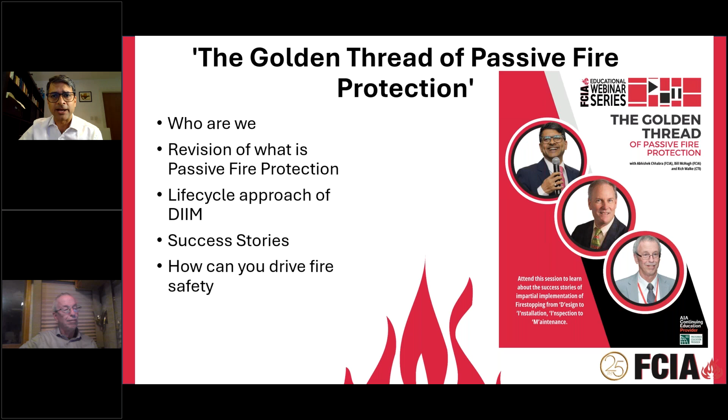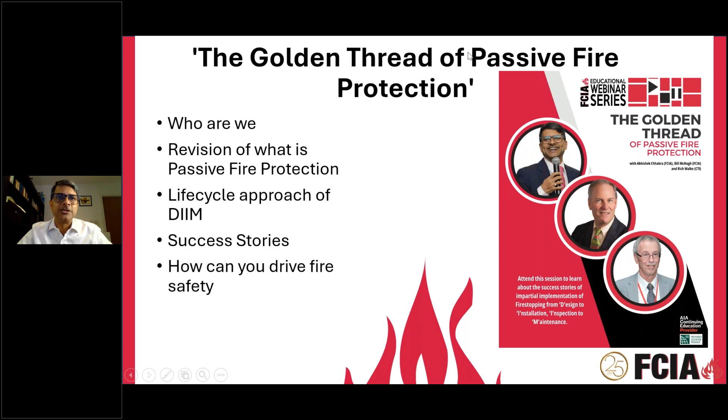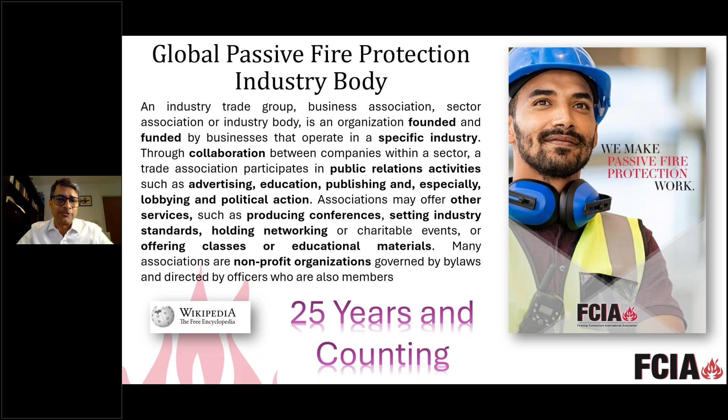We are a very typical industry association, probably very global, within the passive fire protection space. Here is a quick definition from Wikipedia, and I realized that we fit into almost everything that an association would typically stand for. We tick all the boxes of what associations are supposed to do, and we've been around for 25 years, a quarter of a century.

Very quickly, who we are: an international association of specialty firestop and passive fire protection contractors, special inspection agencies, manufacturers, distributors, and more, dedicated to the consistent design, installation, inspection, and maintenance of firestop systems and effective compartmentation barriers, all essential components of passive fire protection.

I'm deliberately taking time to read all of this just to make sure that I emphasize that it is one good big family where people from all over the world are aligned with the goal of driving fire safety across their jurisdictions, countries, and wherever they operate.

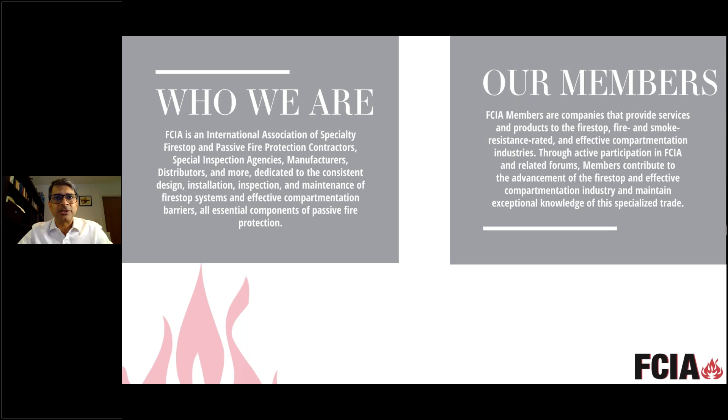Our members are companies that provide services and products to firestop, fire and smoke resistance rated, and effective compartmentation industries. Through active participation and activations like this session, and a whole raft of other forums and platforms where we engage, our members are able to contribute to the advancement of firestop and effective compartmentation, and maintain exceptional knowledge of this very specialized trade that has been enhancing fire safety all over the world.

Our members are global experts and providers of life safety, passive fire, and smoke protection. I'm very excited to share that since 1995, our goals have been and continue to be focused on building the reliability of installed firestop systems through the DIIM, which we will talk about today - what is DIIM - as well as focusing on building the firestop and effective compartmentation industry through advocacy, education, and membership.

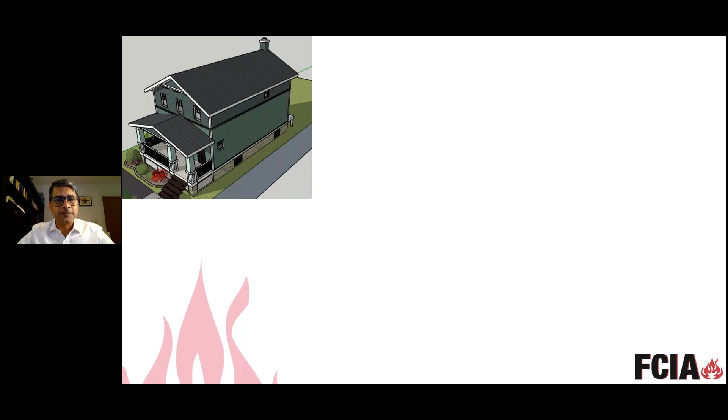At the end of that, I have a small poll again. So please bear with me in imagining what I'm going to ask all of you to imagine. I want you to think along with me and look around and see where you are, just so that we can start imagining and understanding what is passive fire protection. What constitutes passive fire protection? Maybe you are sitting in your home, an office, or a commercial building - look around you, look at how the compartment around you has been created.

Can you imagine or see the walls around you? What are the openings? Some pictures are on your screen to help you understand and imagine this. But for the purpose of imagination, just think: if a fire breaks out in any of these areas, how will that fire get compartmentalized, suffocated, enclosed, and where can that happen?

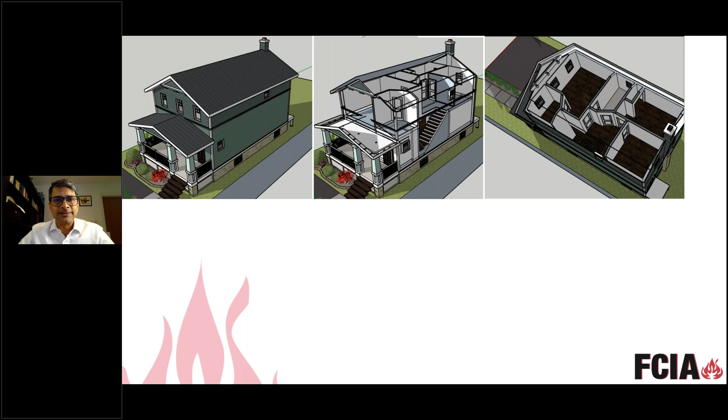This is the primary genesis of containment, or passive fire protection. There are numerous materials, products, and systems that create, build, and maintain this containment. Some of these are here on your screen, and while this is not an exhaustive list, these are primarily the systems that bring about containment, the motive of passive fire protection.

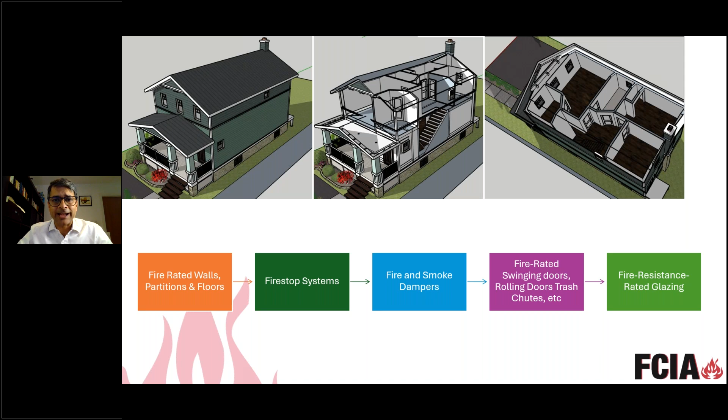This means it is the first line of defense. It can contain the fire even before the sprinklers and smoke detectors function in other parts of the zone or containment area where the fire could have initiated. If passive fire protection has been correctly designed, installed, inspected, and maintained, then if there is a fire incident, it can be contained as an incident and will not become an accident. You will not have all the sprinklers and smoke detectors kicking in. No, it will be contained within the room or floor where the fire initiated.

Very similar to this is structural fire protection. Here, we make sure the structure is able to maintain its structural integrity despite having to face a fire. Probably this is well known: structural steel typically maintains its structural integrity up to maybe 500 to 700 degrees Celsius. But with structural fire protection, or intumescent fire protection, we are able to enhance this structural integrity for a fairly long time.

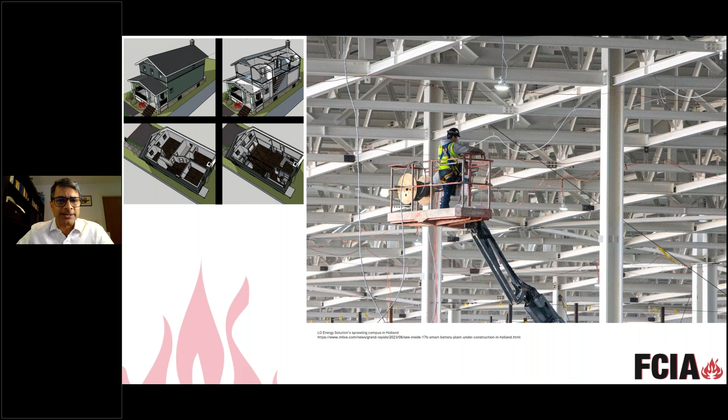Before I delve a little more into the complexity and look through some of the questions that have been coming in, may I just ask the audience to give a quick click of the button and say: where is everyone? How often do people really face or use passive fire protection?

It's good to see I am already getting some questions, and that's very nice. I'd love to hear other questions which we could answer towards the end of this session. It's good to see there are people who use or understand passive fire protection less than 25% of the time, because these are the people we'd love to talk about and share more about passive fire protection with.

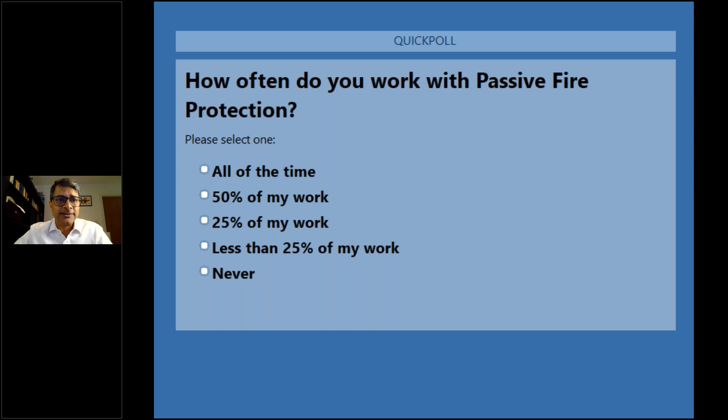I'll give it a few more seconds before moving to the next slide, to touch upon how passive fire protection typically gets implemented in buildings. There is a long list of stakeholders when any infrastructure or occupancy type is conceptualized, designed, delivered, and maintained. The starting point, typically, is what we call the fire and life safety plan.

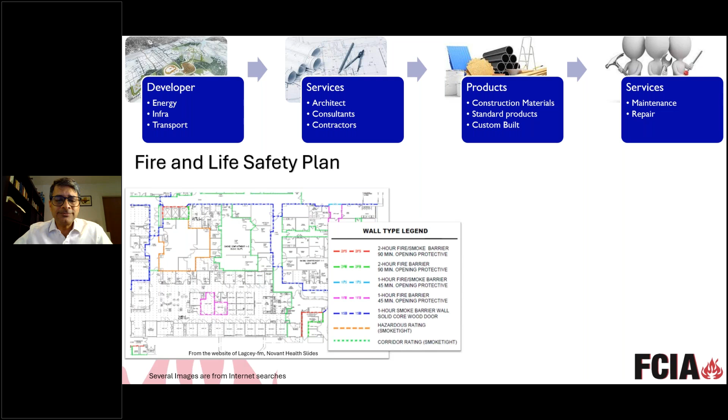You have probably seen a fire and life safety plan, but typically this is one of its outcomes. It will define where all containment is required and how much containment has been designed. That's a great starting point for a lot of types of businesses to come into action.

There are people producing materials, products, and systems, spending considerable time, effort, and energy to prove that all of these can fulfill the requirements of the fire and life safety plan. These products and materials can be correctly designed so that what was originally thought of in the plan, to ensure fire and life safety is maintained, can actually be maintained. So there is a lot happening in this space.

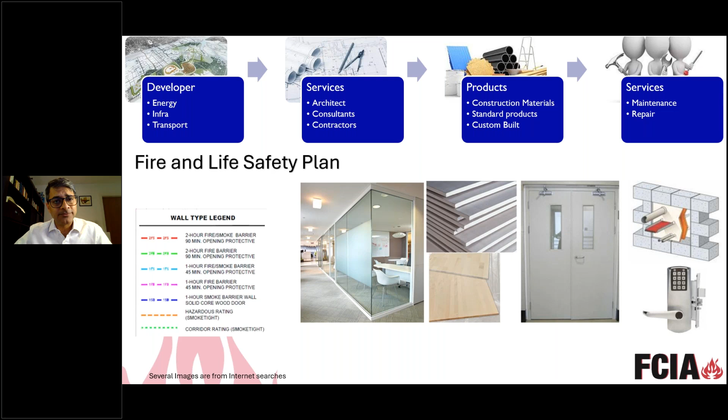Once all of this is correctly done and the building changes hands from contractors to occupiers, that's when maintenance comes in. Here is a quick snapshot from the Joint Commission, a global accreditation body within the healthcare industry, which talks about the requirements of maintenance and inspection. The JCI requires an annual inspection report of all passive fire protection installations, meaning what was designed in the fire and life safety plan, and what was built, now has to function and show that it continues to work to maintain fire and life safety all across.

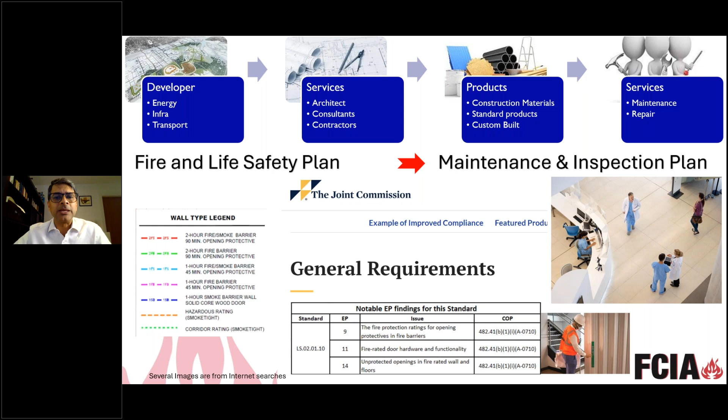Sometimes all of this can be very, very complex. In order to bring sanity to this complexity, FCIA as an association has been spending a lot of time and effort solving these issues and challenges by bringing about various standards. I'm going to move on and hand over the mic to Bill after this slide, and allow him to introduce some of the key tools and the DIIM model of FCIA, which has been providing the basis to the industry and users everywhere to make sure passive fire protection is designed and delivered correctly. Over to you.

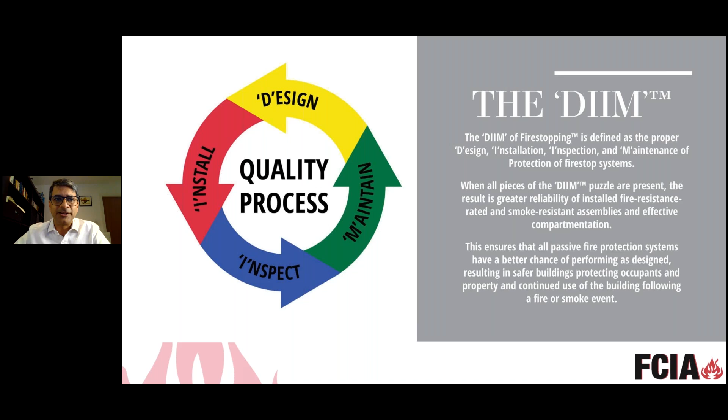Thank you, Abhi. Are you around? Yes, I'm here. Really appreciate it. Had an echo just for a second.

Hopefully it's gone. Good. So let's talk a bit about the DIIM. This is really an industry story, if you think about it. This discussion actually started long before the FCIA was formed in 1998 and 99.

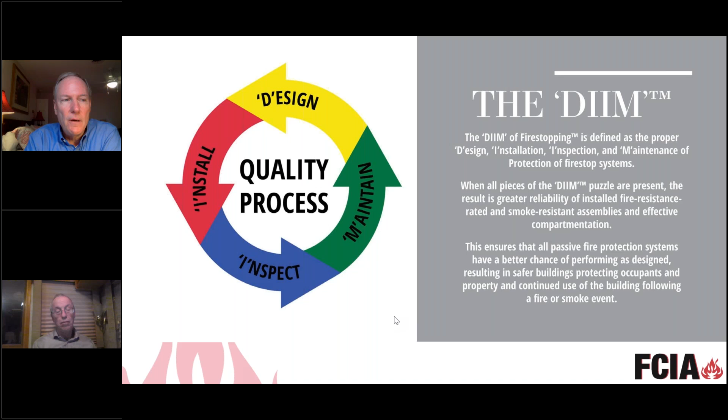Rich Walke and I attended and spoke at a Construction Specifications Institute conference. It was a chapter meeting, downtown Chicago, and we brought together the whole passive fire protection industry, as much of it as we could gather in a short time for an evening presentation about fire resistance in buildings and passive fire protection. We actually talked about this, but we didn't name it, the DIIM.

We did not name the proper design, installation, inspection, and maintaining protection at the time. We just asked the questions. How come there isn't something that separates the contractors that really get what fire stopping is from those that don't? Why don't we have inspection like there is in fireproofing, for instance? Why don't we maintain protection of existing buildings? This is an industry story. It started in 1994. And then when the association formed in 1998...

At that time, I was actually a contractor trying to buy a good-sized contracting company. And I was a founding member along with 7 or 8 others, and we sat around a table and asked these same questions. Why isn't there good, strong specifications, code requirements, standards?

Why isn't there an installation program that separates the contractors that get it from those that don't? Why isn't there inspection? How come we don't have a book or a knowledge base to teach from? What about getting involved in codes and working with specifiers to really make this industry such that the products made by the manufacturers actually get installed the way they were supposed to be? How do we complete that circle? And that's where this proper design, installation, inspection, and maintaining protection philosophy, the trademarked DIIM, came from.

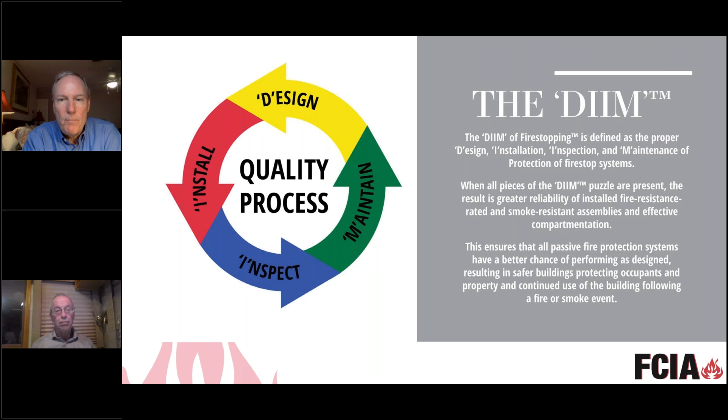And we'll talk about how that came together in probably the next slide. So let's hop on to the next thing there, Abhi. The next slide, and off we'll go. So let's talk about the D, design, first.

Once we have these programs, I'll talk about the IIM, all three of those. We should actually be talking about IIM first, then D. So we call it IIM instead of DIIM, at least this morning. But the D is a whole bunch of things.

Certainly it's about construction documents, and that's what the specifier does. That's their job. The architect's job is to take what is written in the building codes, regardless of where they are in the world, and communicate it through the construction documents to the contractors, the general contractor and the Firestop specialist contractor. How are they going to do that? They have to understand what's going on in the industry and communicate what they think is the right thing to do. That's where we work with specifiers to make sure they have the proper 078400 specification.

We also work with the code officials. Rich and I, in a couple of weeks, will be in Long Beach, California for about almost two weeks to present about passive fire protection just as we are today. After that we have an expo to talk about some of the code issues, then we'll be at the code hearings discussing what the 2027 version of the International Building Code will look like in Chapter 7 on fire resistance. So the code officials get some of the D design, the specifiers get some of the D design.

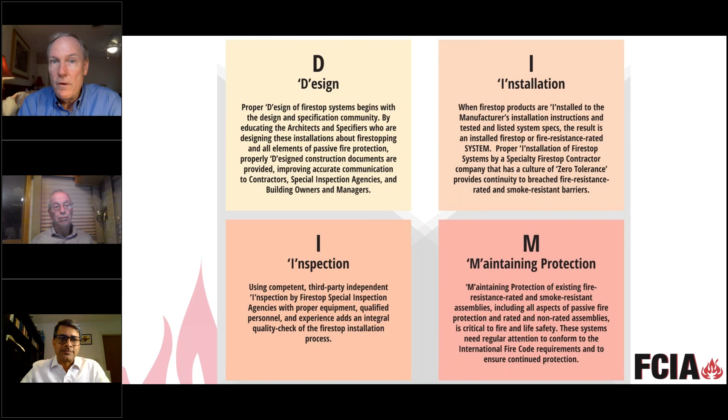But this whole thing wouldn't have started — that's the other I — wouldn't have started if the FCIA members didn't say, hey, how come we don't have inspection? Well, guess what, we have it now.

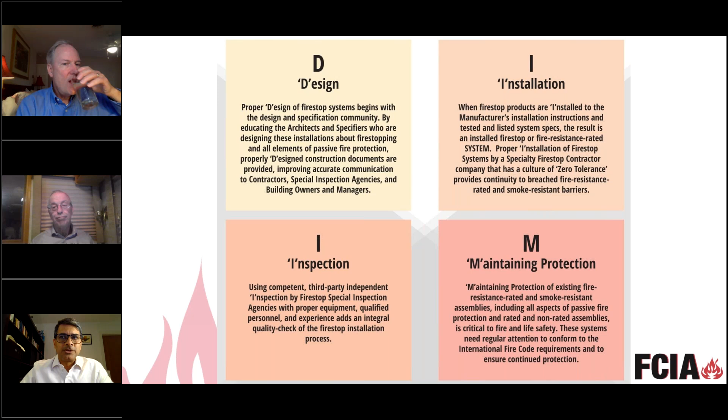Before I welcome you back, Bill and Rich, to walk the audience through how such a set of efforts that you have all done, and the members and all the hands that came together, have been able to create so many systems, standards, procedures, and the manual of practice, which embodies all of this learning, and how they have been adopted across the world.

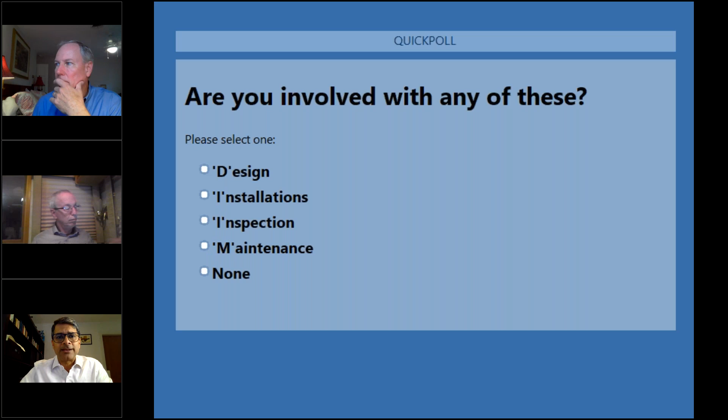Almost as a picture to the new members and the future members, here is an association, here is a body which has already been able to progress and create some of these tools which are being adopted very easily, because a lot of the work now has evolved to be standard agnostic and code agnostic. Our friends from the UK, Europe, India, Asia, Southeast Asia, the Middle East, are very familiar with the fact that even if they work on other standards - British standards, European norm, ISO, Indian standards - the DIIM philosophy, the DIIM platform can provide them an easily adoptable method so that there is a global harmonization in the language of passive fire protection, installation, maintenance, and the trust on passive fire protection increases more and more globally.

So I'll pass it back to you. I have the response of the poll questions - I let the audience punch in the answers. It's a great group that we have. We have designers, installers, inspectors who are all part of the audience. I'll just nudge everyone else to punch in the answers if you have not answered before.

Bill, you can go ahead and talk a little more about design. Can I move to the next slide? Please do. I'm seeing the poll still. There we go, perfect.

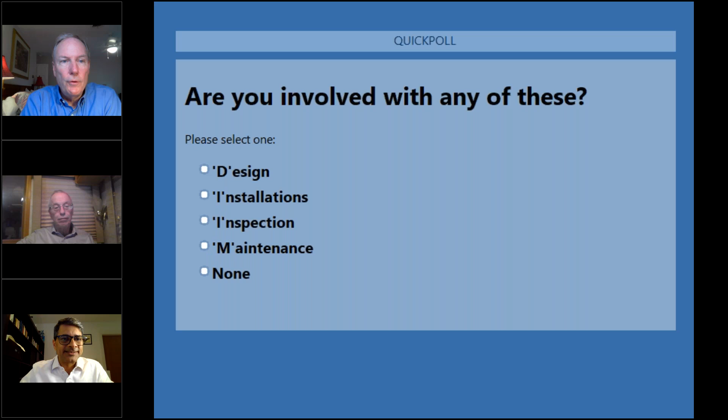Okay, so we've talked about D-Design, and Abhi's got the specifications up there - sorry, I install the FM 4991 UL Qualified Contractor Program. Both those programs wouldn't exist if it wasn't for the FCIA, and frankly, we believe that this has helped change the industry from those that don't know what they're installing to those that do.

The percentage of contractors that are FM approved or UL qualified doing work varies by type of building. Super high-rise buildings get an FCIA member, FM 4991 UL qualified contractor about 75% of the time. Hospitals also - I'm talking North American stats right now. Dubai stats might be pretty high too, because we have a large percentage of FM and UL contractors there.

The inspection though - I could say the FM and UL programs worldwide, we've got companies in South America and Mexico that have jumped in. We have companies in Canada, Dubai, Doha, Europe. We've got some people in India working on it - I know because they came to the FCIA symposiums in June in Dubai and took the exams. And who knows where we go next.

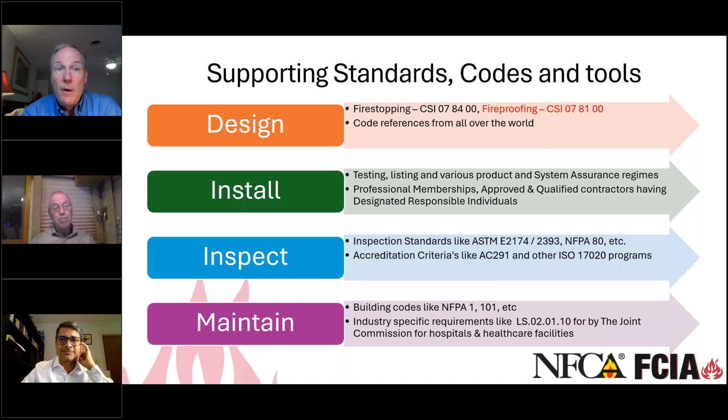And if you think about it, this DIIM is actually the structure needed for where some areas might not have governance, if you will, that covers the installed quality. You know, maybe there aren't any rules. This DIIM is the rules for this industry. And it's self-governance, if you will, in a big way to try to improve the installed quality so it works when it's called upon by fire.

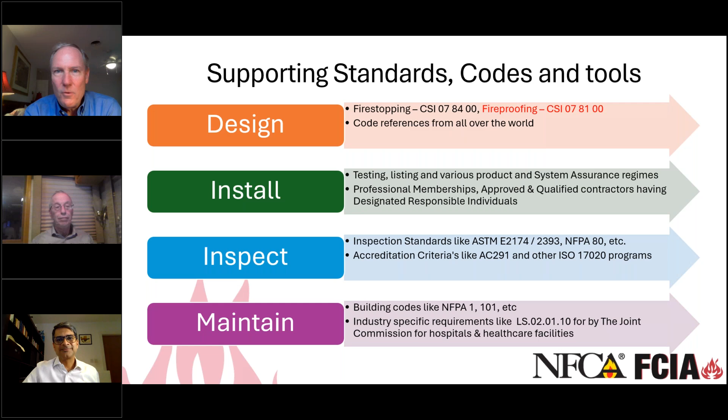While we talk quickly about DIIM and the history and all that kind of stuff, the real objective is to make sure that these products and systems work. It's our whole objective with it. We had to do a lot of work to get it together, though, in order to build the industry.

The building codes, as Abhi's got here on the slide, really lay out the requirements and bring rules, regulations that are adopted by local communities or countries, emirates or provinces or states, wherever we are. These codes lay out the basic requirements, whether we're in the NFPA 5000, the NFPA 101, the appendix of both of those references the FM 4991 UL Qualified Contractor Program, the appendix. That's non-mandatory, but the appendix references the contractor installation programs.

It also references the ASTM E2174, E2393 inspection standards in the appendices. NFPA 1 actually references the 2174, 2393 standards for inspection on high-rise buildings.

The International Building Code of the USA has special inspection required, the ASTM 2174, 2393, as part of the International Building Code, where high-rise buildings are 75 feet and higher above lowest fire department access - so that's about 23 meters, I think - and also for residential occupancies with more than 250 occupants. How'd all this stuff get in there?

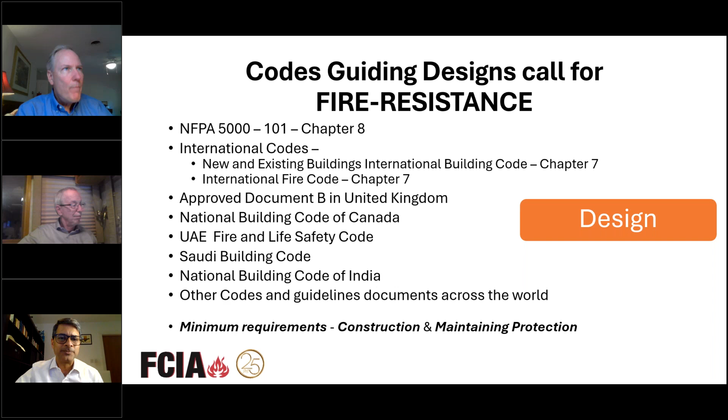I'm going to jump in because you talked about the UAE Fire Code, Saudi Building Code, and the National Building Code of India, and I'll come in quickly because we talked about installation ready and compliance. I've been very actively involved in the UAE Fire Life Safety Code, and I was in Saudi Arabia almost all of the past week at Intersec, and I've had very good interactions and meetings with SASO and with some of the acting AHJs and consultants.

To kind of impress upon the fact that whether you have a prescriptive code, a building code, or a guideline document followed in a given country, these are all containers that provide the basis of how things should be done. I'm happy to report that some of the tools that the Contractor Association—which was originally just a contractor association and now has the whole passive fire protection industry involved—have created are so implementable.

You talked about approved document B talking about fire resistance. Just a couple of weeks ago, the United Kingdom decided to shift to the EN way and remove BS 476 for fire resistance as well as reaction to fire tests. The thing is, we all have these tools about compliance, and we need to adopt and use some of these mechanisms that we are talking about, provided by the DIIM.

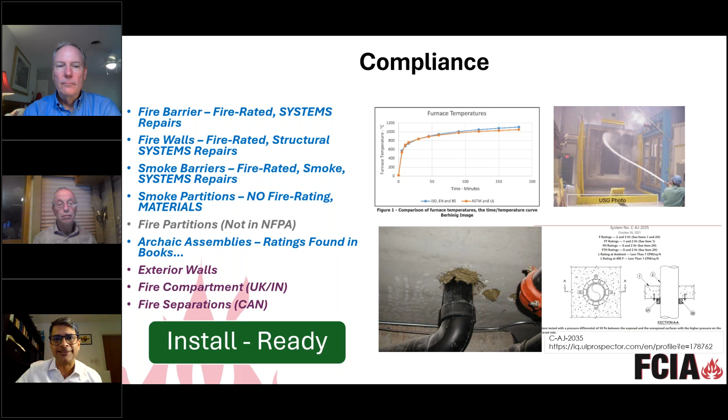So with that, I'll move one slide further ahead, keeping in mind that we have limited time, and we want to finish off the DIIM so we can have some time to address questions as well.

Very good. So when you put up the slide that talked about the barriers, quite interesting. At the various conferences, Rich and I have conversations with other industries - the fire dampers, the fire doors, the fire rated glazing, and the wall assembly itself. We meet with the gypsum associations, the National Concrete Masonry Associations, to make sure they have a bit of the DIIM also.

And certain industries have taken pieces of it, but the FCIA and the Firestop industry has taken it all, starting with the I in DIIM - install. The FM 4991 standard for the approval of Firestop contractors, the UL qualified Firestop contractor program, are very unique. There are no other programs like it.

In subcontracting, general contractors use it using the ISO 9001. The FM and the UL contractor programs were just that - management system-based programs to build a good company with great operations, resulting in installed fire stopping the way it was supposed to be done in the first place.

So our specifiers, we recommend that you specify these contractor qualifications, because currently they're in several codes around the world - not everywhere, but it's good to have both. The code requires it, make sure the specification requires it as well.

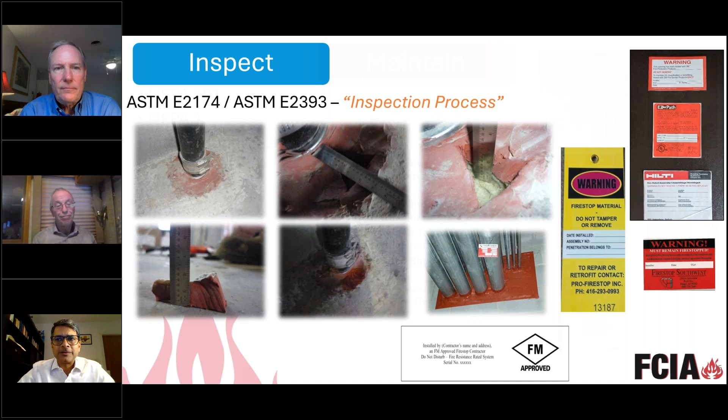He actually chaired the committee to break out passive fire protection into separate sections for each passive fire protection element. Prior to the 2018 version of that code, it was one paragraph with all of it mixed in. And what Rich did with his task group was build this. So go ahead, Rich. Yeah, I was going to say the existing language in the code at that time was very disjointed.

So I was asked to chair a task group to rewrite Chapter 7, covering fire and smoke protection features of the International Fire Code, published by the International Code Council, or ICC. We took a very disjointed section and broke it into individual components, each covering some aspect of fire resistive construction.

We had a section on basic fire resistance, ASTM E119, the walls and horizontal assemblies. We created a section for fire stopping, another one for joint systems, another for opening protectives, in other words, fire door assemblies. And then the last, we created a section for fire and smoke dampers.

So each section then contained the requirements for maintaining the performance of those items over the life of the building. And probably the most important feature of that chapter of the code, it calls for annual inspections by the building owner or their representative, forcing the owner to do a review, typically hiring somebody, and then the results of that review or inspection of the building are turned over to the fire officials, who in turn have the enforcement power to make sure things are repaired if need be.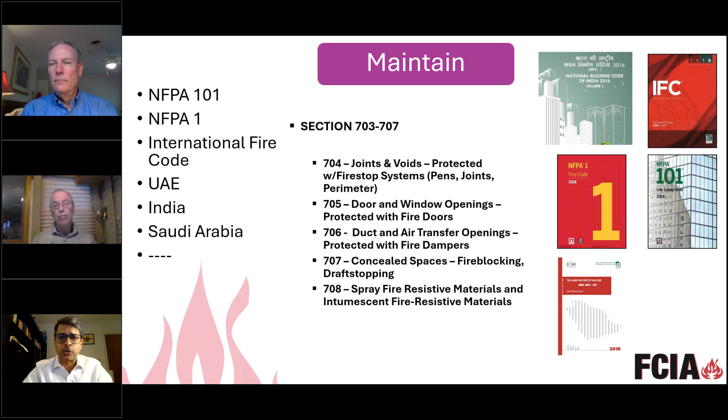So on one side, it's very insightful for the whole audience to listen into the journey of how it evolved, but also to see, listen in, and visualize how powerful some of these systems are. And I just have a quick slide to talk about how a lot of these tools have adoptability when we are looking at assuring passive fire protection in general.

So right from the time when whatever containment is needed is designed by the fire and life safety plan, whether it is a prescriptive code or a code that allows you the flexibility to design as per the requirements unique to the occupancy type—drawing from this and right till the maintenance stage—we go through these phases.

We need standards. These standards could be American standards, European standards, British standards, Indian standards—whatever has been designed as per a building code should be validated for compliance of products, materials, systems. You could choose a standard that functions in your jurisdiction, but the message is compliance and checking for compliance. Of course, the systems stemming from United States—which, as I tell all my friends, is a potentially litigative market as compared to so many other markets in the world.

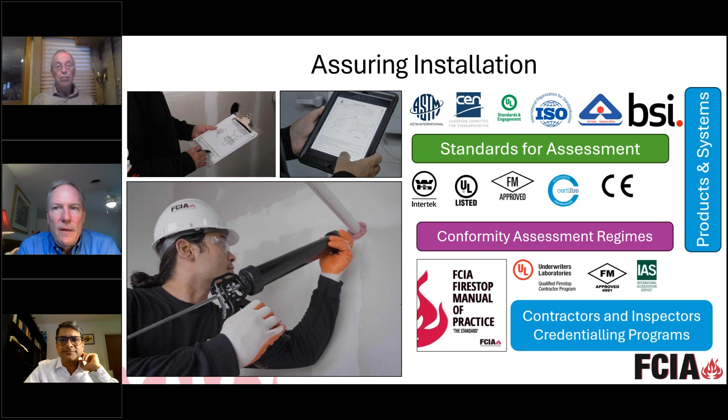I think it's a great summary here. It's pretty amazing how the FCIA Firestop Manual of Practice started as a very North American centric document, but in 2018, Rich and I and one of his ex-colleagues developed a chapter on the Manual of Practice that covers standards and codes worldwide. That chapter went from about 15 pages to about 180 pages by the time we were all said and done, describing the various standards for fire resistance around the world.

So, Abhi, when you made the point that it's standards agnostic - while the current exam does cover the ASTM and UL standards and ULC standards, in the future we'll be doing some further questions on those other standards, the ISO 834 and others. We've been trying to take this DIIM story to other countries, or other industries I should say, so that all passive fire protection gets this, not just our firestop industry.

There just were some questions that came in, Abhi. You want me to start covering them? Sure, please go ahead, Bill.

I want to pick up a question - somewhere in the list of questions there is someone who wants kind of a comparison between ASTM E814 and BS476. This is a very typical one, I call it a curveball question. This is a difficult question for the panel to answer usually.

And hence I thought, let me pick up the most difficult one and share my perspective, having worked for fire testing labs who have been offering services across regions and across test standards. The question gets complicated from a user point of view and a usability point of view. So I want to set into perspective three separate things in order to answer this question.

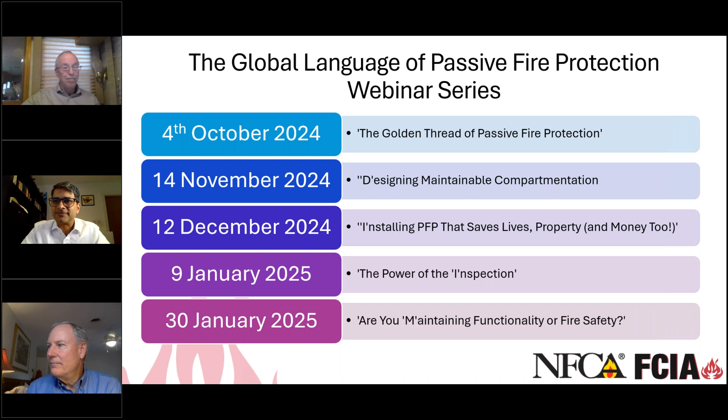I can end it for you there, Abhi. I'll push the button. Thank you, Bill. All right. Thank you. Bye-bye.